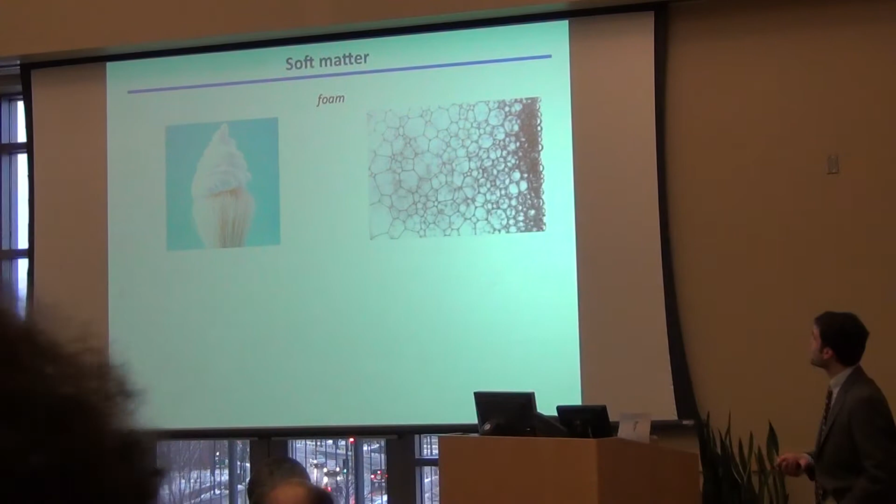So I'm sure at this part in the seminar series, you've heard many versions of the soft matter intro. Let me say that my own interests are in the world of soft materials. So it turns out that soft matter systems display an amazing variety of material properties. So for instance, I don't know the last time you thought about foams. For me, it was this morning when I realized I'd forgotten my shaving cream in Philadelphia. But a NASA press release once described these things as 95% air, 5% water, and yet they behave as if they're kind of soft, springy, squishy solids. Somehow the collective interactions of these simple constituents give rise to a type of solidity.

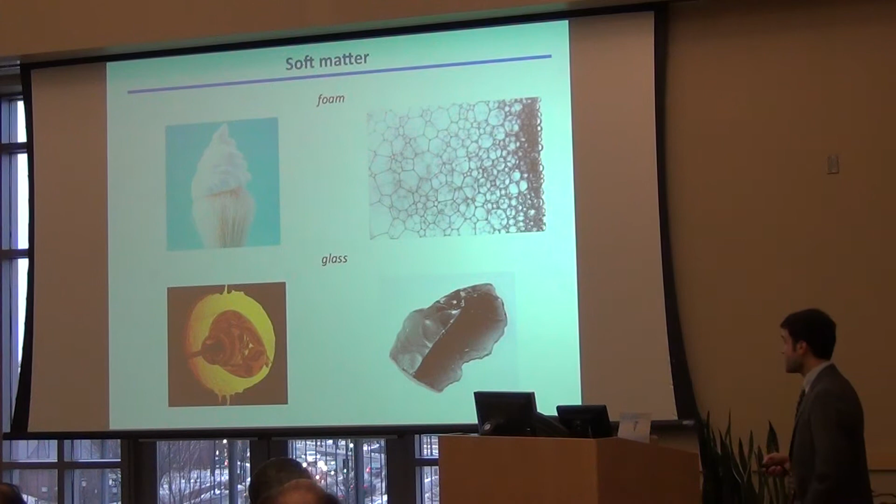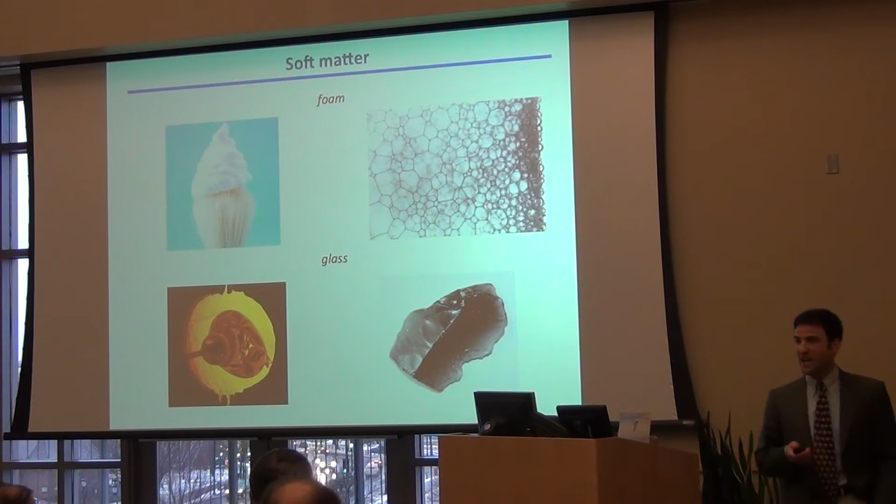Glasses are another canonical example of soft matter systems where, if you look on the atomic scale, they look like disordered fluids, but they too behave like solids, in some cases exemplary solids. So for instance, glasses can hold a monatomically thin edge, so you see them used in surgical scalpels. Soft materials are also the kind of delicious emulsions of fats in amorphous sugar matrices that make our life so delicious. And also the so-called Bingham plastics that we use to clean those emulsions off of our teeth, hopefully more than once per day. The thing I'll be particularly interested in sharing with you today is my work in granular materials. So granular materials are implicated in everything from avalanches and earthquakes to fascinating soft robotic systems.

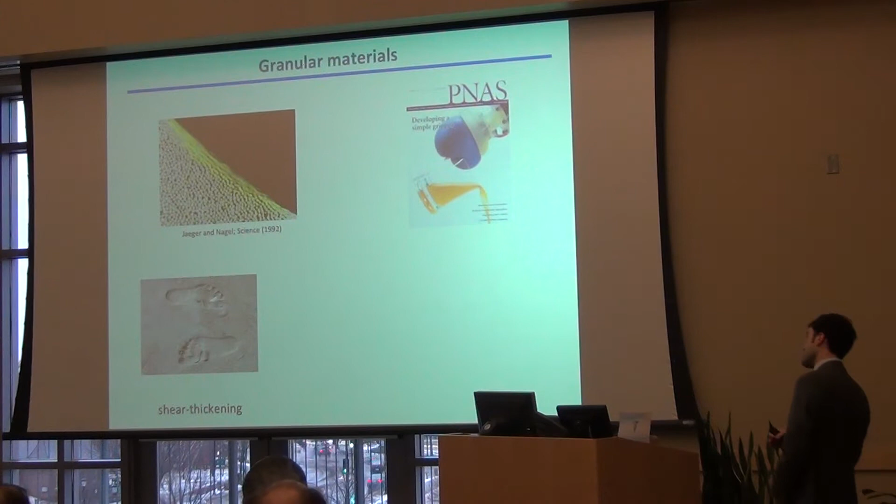But you don't need to go to exotic systems to appreciate how weird sand can behave, right? So I was informed that there are actual sand beaches right here in Burlington. For me, growing up in rural Maine, I didn't have the pleasure of walking on a wet beach until I was in my 20s. But maybe if you have walked on a waterlogged beach, you've noticed that in the wake of your footprints, there's this raised ring of dried out sand surrounding each footprint, right? And it turns out it's because wet sand has this interesting shear thickening property, sometimes called the dilatancy property, where the harder you try to shear it, the more it resists shear deformations.

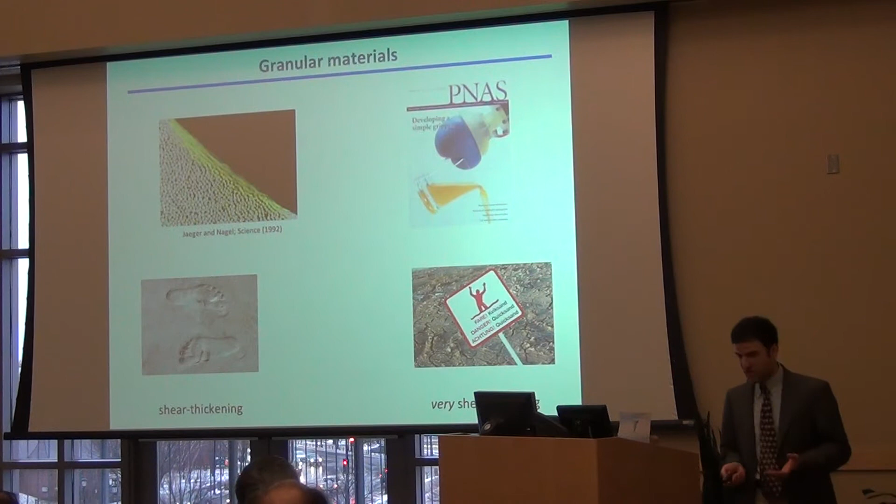The extreme other end of this is when you have just enough water to lubricate some of the frictional contacts between grains of sand, and you get very shear thinning behavior. Materials that look pretty solid, but as soon as you try to stress them, they transition to a more fluid-like state. In between these two extremes, you get what is maybe my favorite animation of all time, at least in the category of granular materials, something of a caveat.

Here's a worker somewhere in northwestern England, walking on a quicksand-like substance. And if you didn't know better, you might think that he was actually walking on a membrane suspended over some fluid media, right? Because, I mean, look, you can see these beautiful ripples emanating from each of his footsteps. At the same time, if you look carefully as he hops so delightfully around the circle, you'll notice that he's actually leaving footprints in his wake, right? So apparently, even though you get these fluid-like ripples, this thing really is a solid, capable of undergoing plastic deformation and maintaining the shape of imprints on its surface.

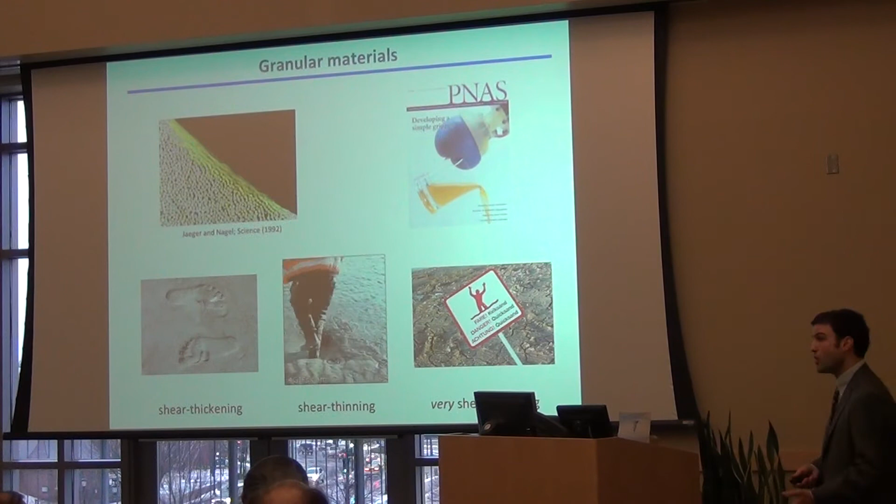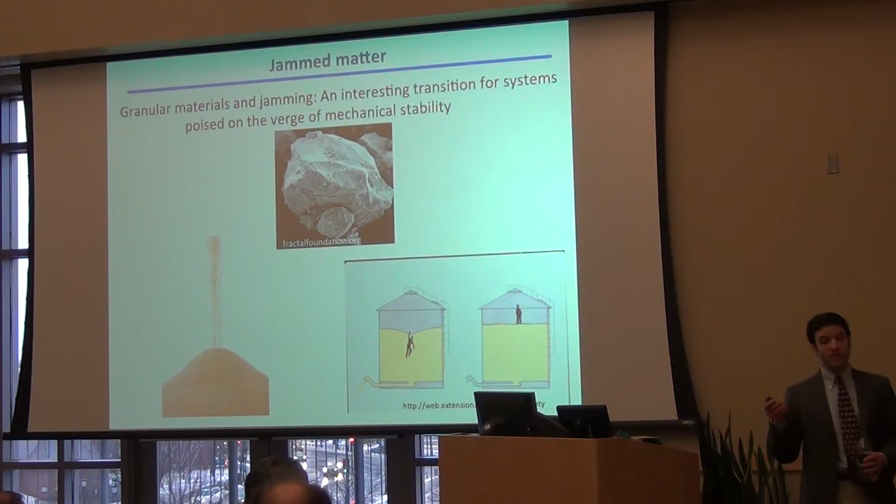It turns out that granular materials are often perched like this substance right on the precipice between fluidity and solidity, or between mechanical stability and instability. You've seen this maybe every time you've sprinkled grains of sand on a sand pile and watched it trigger mini avalanches as the system tries to regain mechanical equilibrium. Or if you've spent any time in the Midwest, as I have, maybe you've seen some of these delightful but, of course, very serious safety illustrations indicating how precarious the difference can be between standing on top of a pile of grains of corn versus being tragically sucked under.

So in this talk, I'm going to be interested in exploring these kind of granular materials, and particularly interested in looking at their interfacial properties. So how do these systems behave at the interface where you might want to mechanically interrogate them?

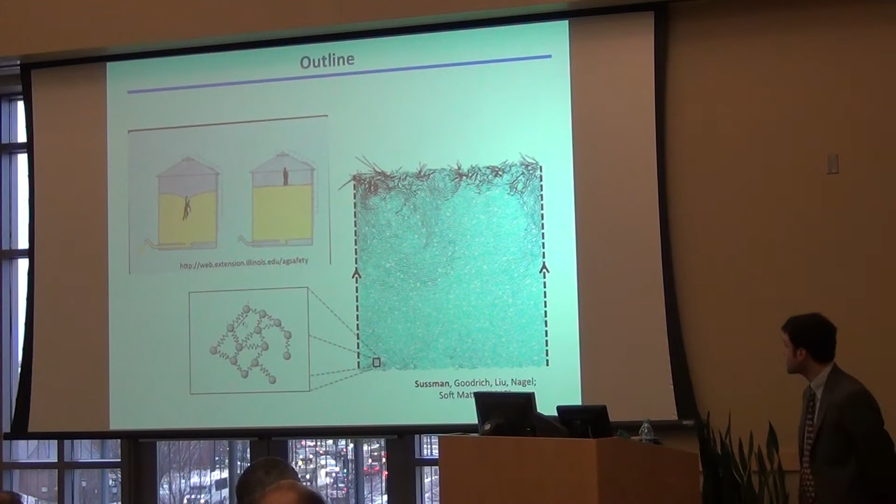The schematic outline of my talk is as follows. I'm going to start by introducing a simplified model of granular materials that we'll use as a touchstone throughout the rest of this talk. I'll then say a few brief words, introducing you to some ideas from topology, and then move on to Maxwell counting, which at this point can just be a bit of jargon, but by the end of the talk we'll understand as a way of thinking about the interplay between degrees of freedom and constraints in different systems in a very generic context.

We'll use these ideas to understand the mechanical properties of our model system, and then I'll finally close the loop and talk about how the topological ideas I introduced in the beginning really help us understand the interfacial properties of these granular media. So obviously there are a lot of moving parts in this talk. It's going to be something of a rolling tour through a lot of ideas, but I promise, just like in your favorite Dickens novel, all of your favorite characters will meet up at the end.

So, granular materials. Real grains of sand, it turns out, look something like this. And while that's kind of, I think, aesthetically beautiful, as a theorist, I find it extraordinarily daunting, right? Because this is about as far from a spherical cow as you could get. So real granular material has bizarre shapes, it has frictional interactions, sometimes complex electrostatic interactions. And the idea of modeling and understanding these materials in all of their full detail is something of an intimidating task.

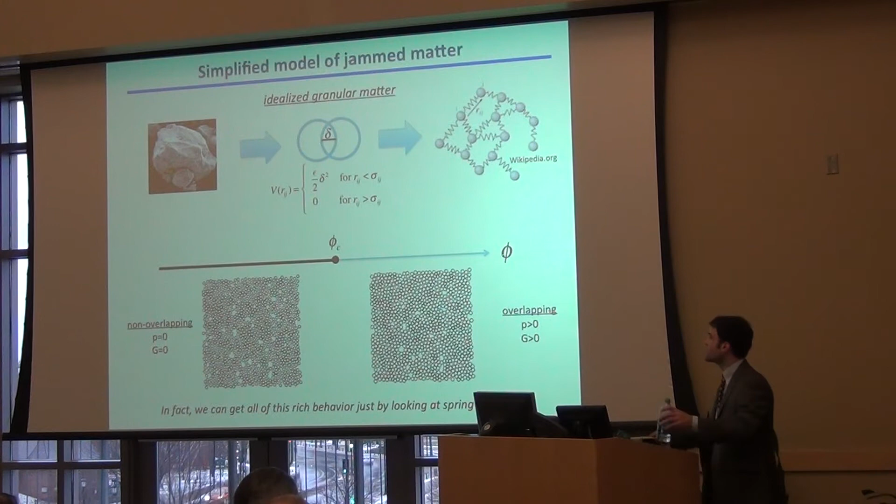So we'll be coming back to this idealized model throughout the talk. Before we start exploring the properties of this model, let me just introduce some ideas from topology. Right, so topology, I would argue in the last, I don't know, X years, where X is some number, has been increasingly used to understand the properties of physical systems, right?

And what is it? It's often somewhat qualitatively defined, as maybe why the coffee cup I was just so generously given is the same as the donut that I wish I'd eaten this morning. I like to think of it as why it's hard to wrap an orange with a sheet of paper. Right? Every map maker knows that if you want to take the surface of the globe and map it onto the plane, you can't do that without making some sacrifices. Either you have to tear the sheet everywhere, or compromise the areas or angles of the forms you're trying to represent.

The version of topology I'll be particularly interested in is this notion of turning geometrical problems, like whether these loops are linked or not, into a counting problem. And the point is that the mechanical behavior of these two systems is really very different. I can take the topologically trivial rings on the left and pull them apart as far as I want. But the fact that there's some topologically non-trivial character here imparts some rigidity to the system. It limits the extent of the deformations I can do.

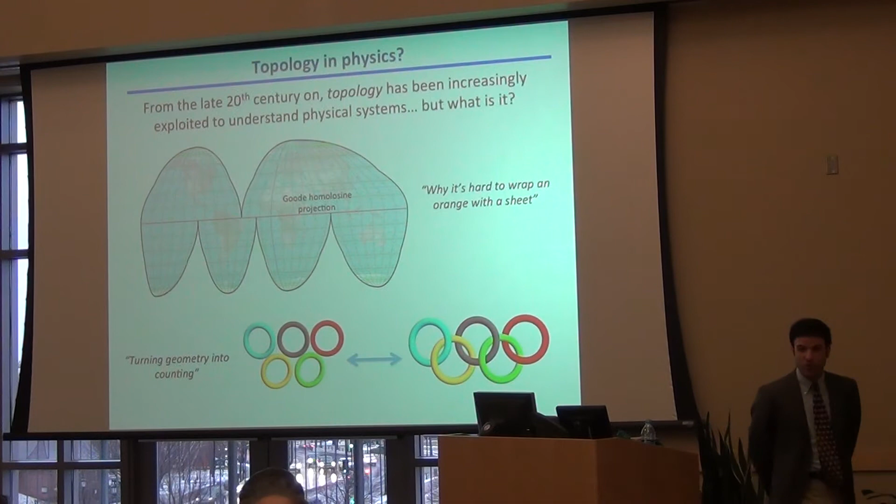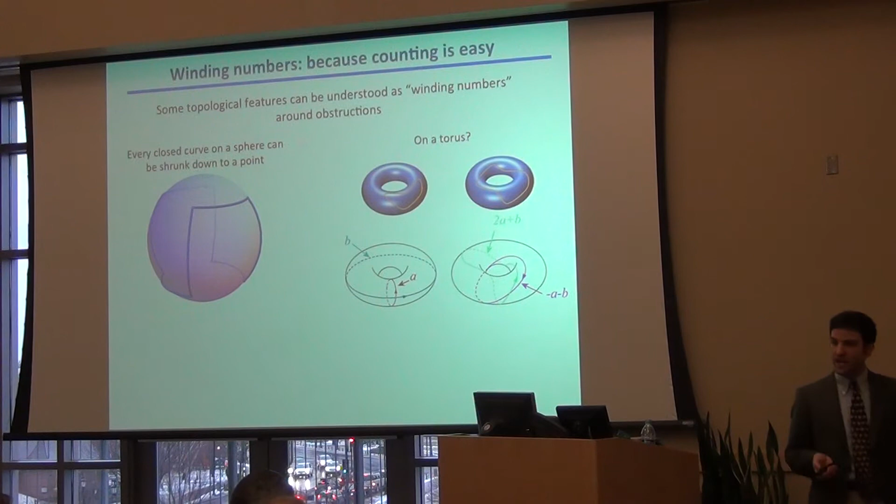So let's explore this idea in a little bit more detail by introducing winding numbers. Right? So imagine you were going to draw closed curves, say on the surface of a sphere. You could imagine slowly changing that curve, slowly deforming it, until you shrunk it down to just a point. You would say you contracted it to a point. If you tried to play the same game on the surface of a torus, you would find, okay, sometimes you can do that no problem, but other times the closed curve you drew wraps around that central obstruction, it wraps around the hole, and so you can't keep shrinking it down.

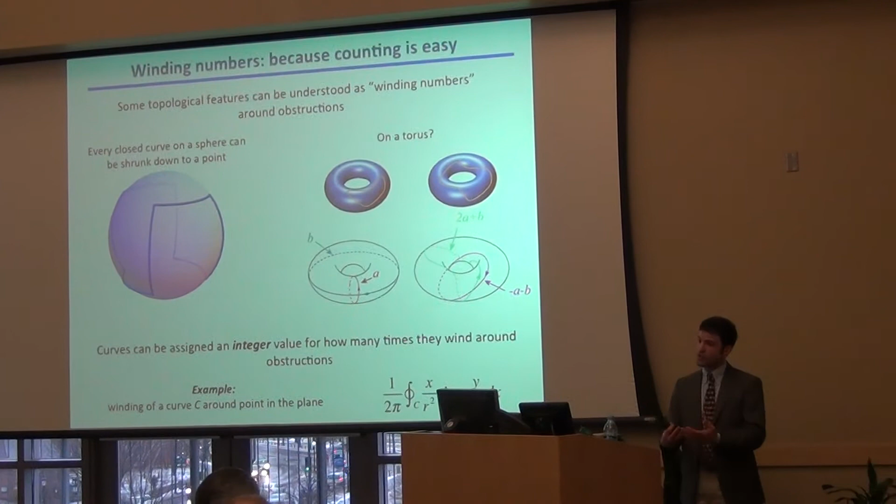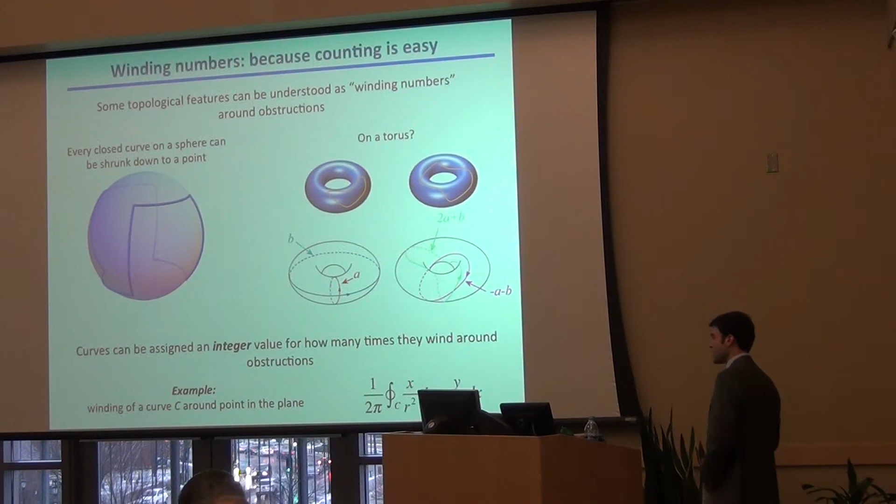So it turns out then that every closed curve that you might want to draw can be uniquely characterized by a pair of integers, just how many times that curve winds around either the long or the short axis of the torus. Okay, so that's great. You might well ask, what are the sorts of physical systems that have these topologically interesting surfaces? And what are the curves that are meant to do the winding on these surfaces that we want to topologically measure? To the first question, of course, I would just answer, well, there are many answers depending on what you want to study, but I would say Fourier space is the most natural

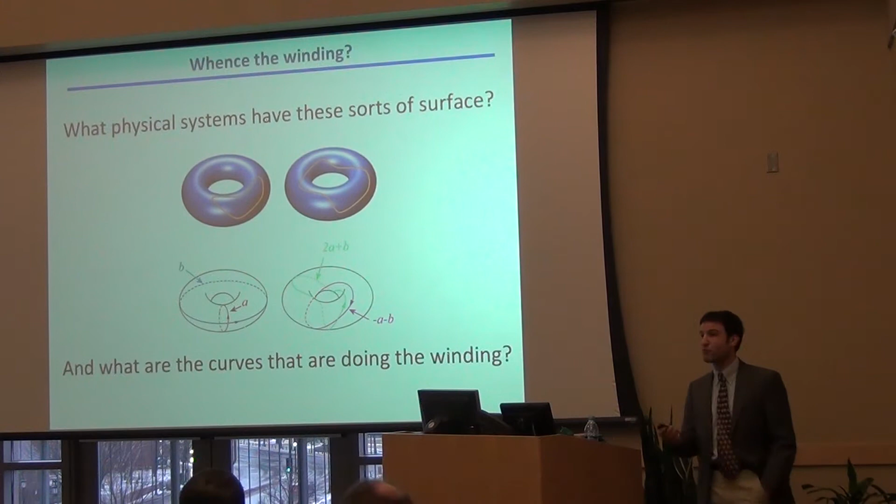representation. So recall, of course, that for periodic systems like electrons in some periodic potential given by a crystalline lattice, Fourier space is the natural representation of things. So the natural basis for your wave functions is given in terms of functions that are periodic within the periodicity of the unit cell, and then some electron momentum terms. Okay? And Fourier space, of course, is precisely a torus, because as you take your wave vector k from minus pi to pi, it turns out you've actually come back to where you started. So going from here to here is the same as going from here around to there. So I guess in a nod to all of my former English teachers, Fourier space is like a natural place around in which to wind.

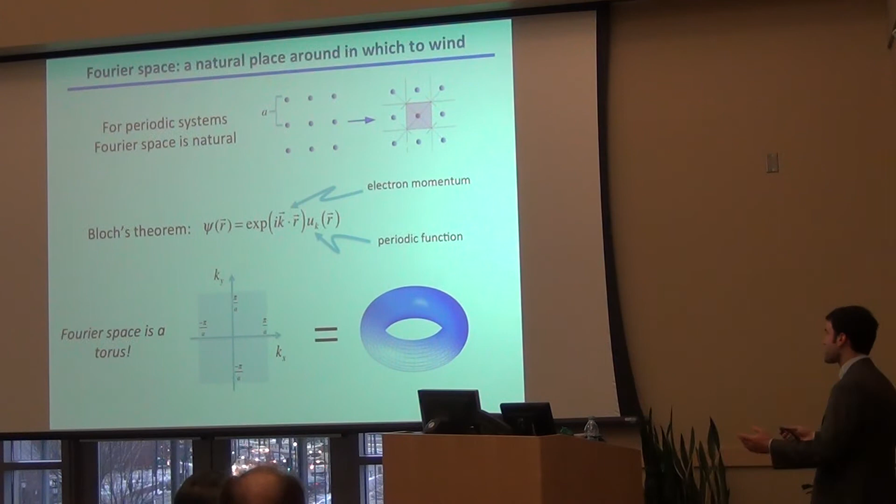Imagine you started at the equator of the Earth, and you had a meter stick pointing due north. You then wanted to walk along the meridian, keeping that stick pointing in the same direction. You get to the North Pole, you walk back down along a different meridian, and then I guess very carefully walk backwards along the equator. And what you find is that even though you tried to keep that vector parallel at every moment, in fact, you've picked up some relative angle between your initial and final configurations. This idea of picking up a relative phase depending on the curvature of the surface around which your curve is wrapping is precisely the kind of intuition that we're trying to capture. So in the quantum mechanical case, the Berry connection kind of works as follows.

You recall that the phase of the wave function is kind of ambiguous, right? Most observables don't depend on whatever absolute value of phase you assign. Of course, interference experiments depend on relative phases.

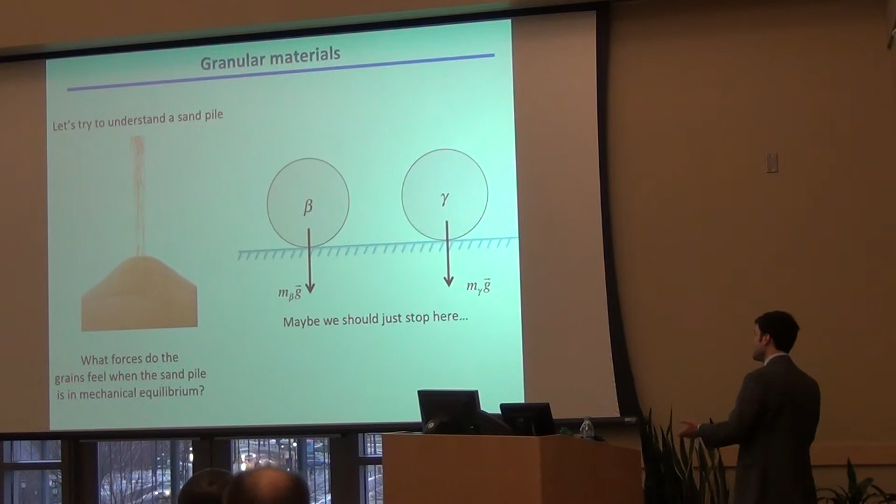Let's start by just doing a simple problem in 2D, where I've just drawn in 3 grains of sand, and I just want to understand what's going on with that third grain. Okay. So, gravity is pulling it down, there are 2 contact forces supporting it. I've drawn in some coordinate system for what the contact forces are. We've all done, I'm sure, many of these free body diagrams.

As soon as you start writing down the equations of mechanical equilibrium, you notice a problem. There are 4 unknowns that we want to solve for here, each of the 2 components of each of the 2 contact forces. But there are only 3 constraints here, right? Force balance gives you 2 equations. Torque balance in the plane gives you just 1 constraint.

And whatever boundary conditions you might want to impose, like static friction, no slip, whatever you like, don't combine to equal a new constraint. So we say the system is statically indeterminate. That is, just specifying that the system is in mechanical equilibrium is not sufficient to specify all of the forces.

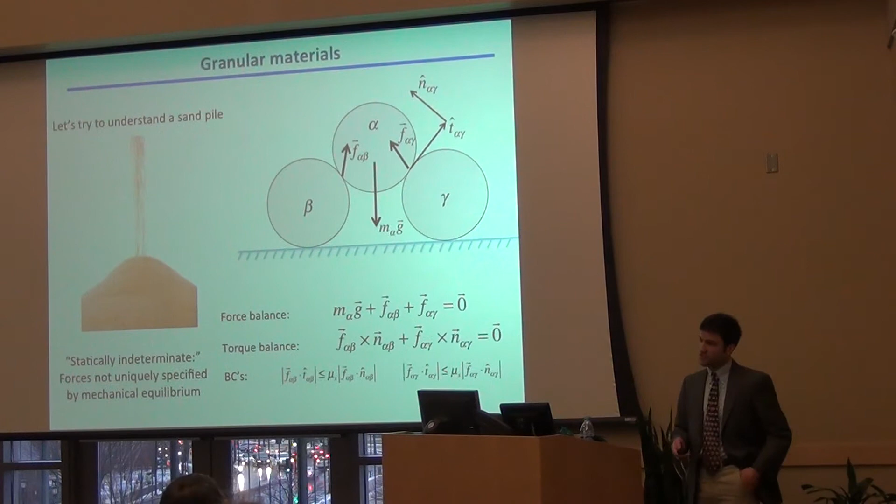So these ideas were used by James Watt to improve the steam engine. And the key point is that this motion doesn't involve changing the length of any of the bonds in that system. So it doesn't cost any energy to perform. So in general, when should we expect to find ourselves in statically indeterminate or dynamically indeterminate situations?

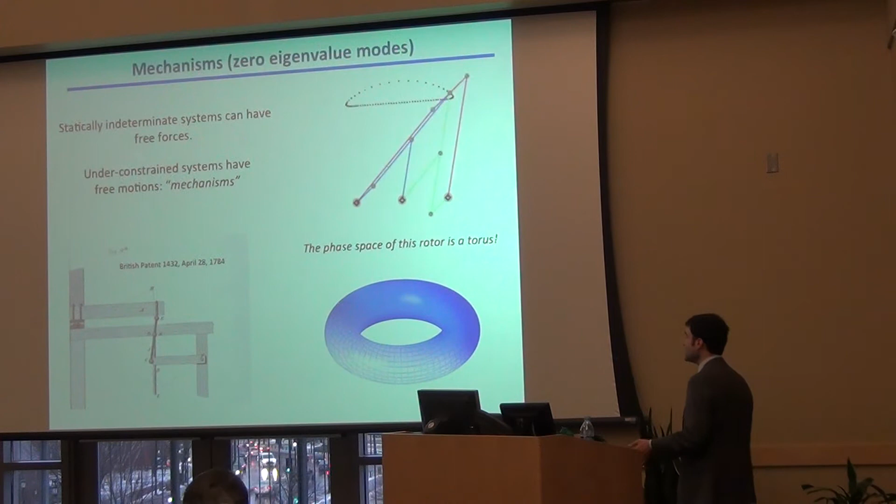An answer to this was given by Maxwell in the mid-1800s, and he gave a purely topological answer. Some might argue it was purely geometric. I'm happy to have that conversation if anyone's interested.

And he said, let's just think about it in the following context. We'll just turn it into a counting problem and say a system is isostatic, that is, it has just enough contacts or just enough interparticle forces to exactly have a rigid structure without being statically indeterminate, if the following 2 things are equal: the number of degrees of freedom in your problem, like the dimension of space times the number of particles, and the number of constraints, like the number of interparticle forces.

The nice thing about this being a purely topological answer is that it applies equally well to many systems, right? Granular materials, but equally well, for instance, understanding the distribution of stresses in classic engineering structures.

Now, what Maxwell actually said isn't just that the isostatic point is when these 2 things are equal. He actually said the number of zero-energy motions, the number of free mechanisms you should expect, is given by the difference between the number of degrees of freedom and the number of constraints in your problem. So the next few slides will just be a lightning round practice to get us all on the same page.

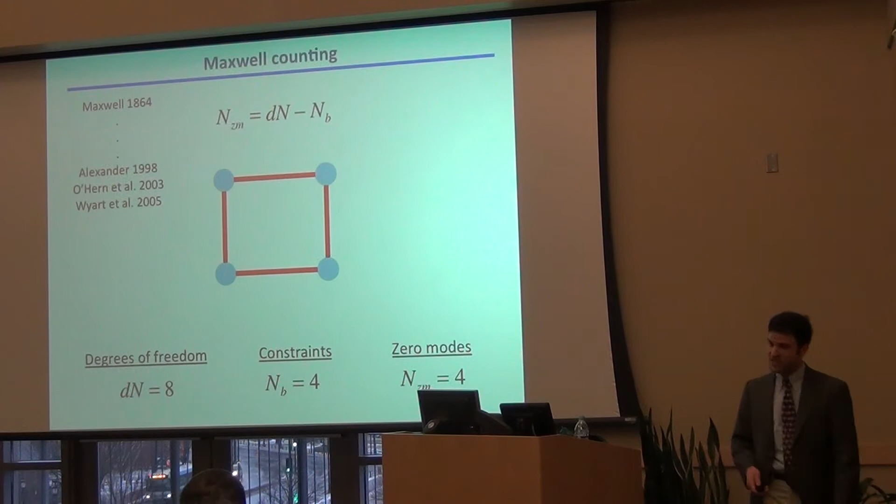Here I have 4 particles in 2 dimensions connected by 4 bonds. So that's 8 degrees of freedom, 4 constraints. Maxwell would say you should expect 4 zero modes. And indeed, there are 2 trivial translations of the whole system and 1 trivial rotation. That's kind of trivial. But there's also this mechanism, a relative motion of the 4 particles that nevertheless leads to no stretching of any of these bonds, so it costs 0 energy.

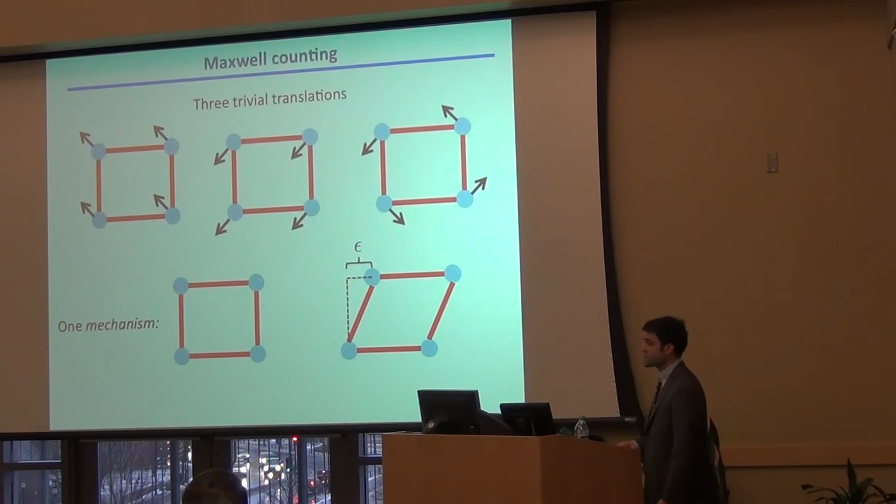Okay, a slightly more complicated example. Here I have 6 particles, 12 degrees of freedom, 8 constraints. Maxwell says 4 zero modes, and they're the same form. There's a center of mass frame for 3, and you get the same shear mechanism as we had in the previous slide. You can throw in an extra bond to get rid of that 0 energy mode, and 12 minus 9 equals 3. You can congratulate me on my hard-won subtraction skills later on.

But what would have happened if we took this bond and put it over here instead, right? The count looks like it should be the same, but it's kind of obvious by inspection that there's a new 0 energy motion, the same one we've been seeing this whole time. So what's going on? Maxwell knew about it, but the answer was rigorously provided by Calladine in the late 70s.

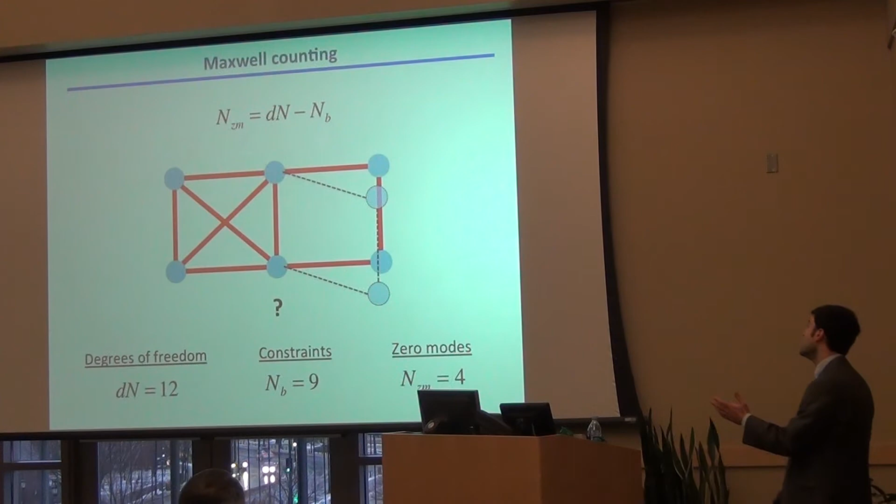And he said, you have to remember that you can be statically indeterminate. If you're statically indeterminate, you can have what are called these states of self-stress. So these are sets of bond tensions or compressions that lead to no net force on any of the particles. Here I've drawn in a simple example. So you can imagine if you take the 2 cross bonds and put them under compression, they push out. Take the 4 external bonds, put them under tension. You could arrange the relative magnitudes of those so that there was 0 net force on each of the 4 corners, right? So that would be a state of self-stress.

And Calladine said, in what you might want to call an index theorem, that it's this interesting difference between the number of 0 modes and number of states of self-stress in a given system that match on to the number of degrees of freedom minus the number of constraints.

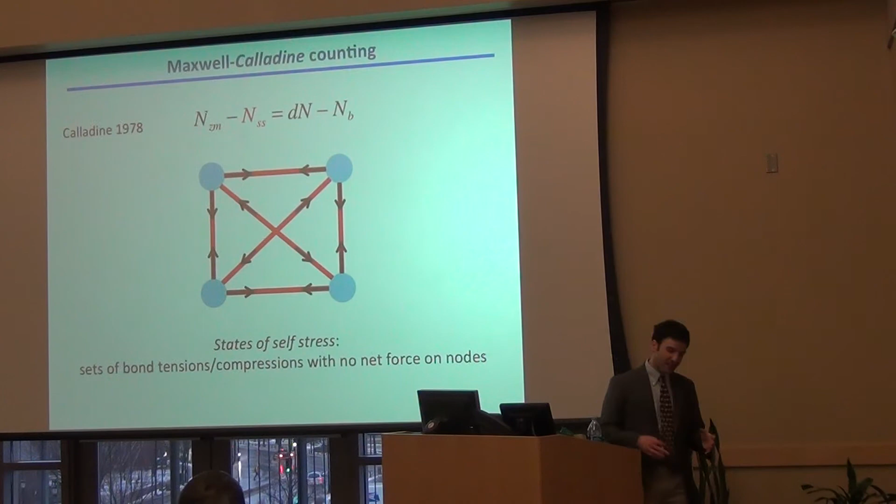Now I want to point out that these are not just kind of interesting curiosities. These states of self-stress form a mathematical basis for thinking about the elastic response of your systems. So in particular, if you want to know the energetic cost of a given deformation, you can write that energetic cost in terms of projections over a sum of all of the states of self-stress in your system. So ideas like this are really used in practice to understand the elastic moduli of materials, or what their response might be.

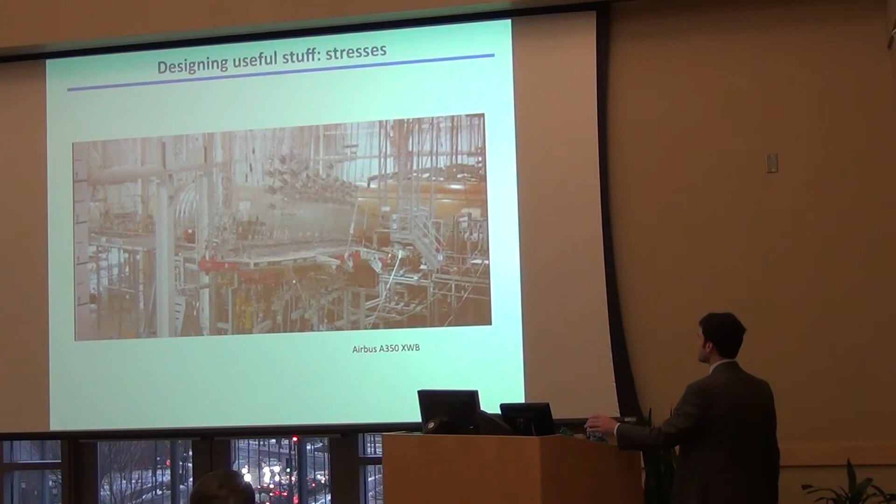Here's just a fun bit of eye candy that I found of engineers understanding exactly how fault tolerant their airplane wings are. I really believe this promotional video was meant to be reassuring, and I did not find it so as I was flying over here last night.

But anyway, you might ask, so far all of the systems that I showed were simple arrangements of particles that you could analyze by eye, right? So how do you imagine taking these Maxwell counting ideas to complex systems, like the sorts of large simulations of model granular material that I claim that I'm interested in? The answer is to turn to geometry. And so in particular, you want to introduce these 2 objects, the equilibrium matrix and the compatibility matrix.

The equilibrium matrix is an object that, given any vector of bond stresses, returns a vector of the net force on each node. Similarly, the compatibility matrix takes a vector of node displacements and tells you how much each bond has to strain in order to accommodate that motion. These, of course, rely only on geometrical information. So if I tell you what the pattern of connectivity between nodes is, and I tell you the node positions, that geometry is sufficient to completely and easily reconstruct what these matrices have to be.

It turns out they're intimately related to each other. It's an application of the principle of virtual work, that these 2 ways of writing down an energetic cost, either displacements times forces or stresses times strains, have to be equal to each other. And so plugging in the definitions, you can learn that the compatibility matrix and the equilibrium matrix are just transposes of each other.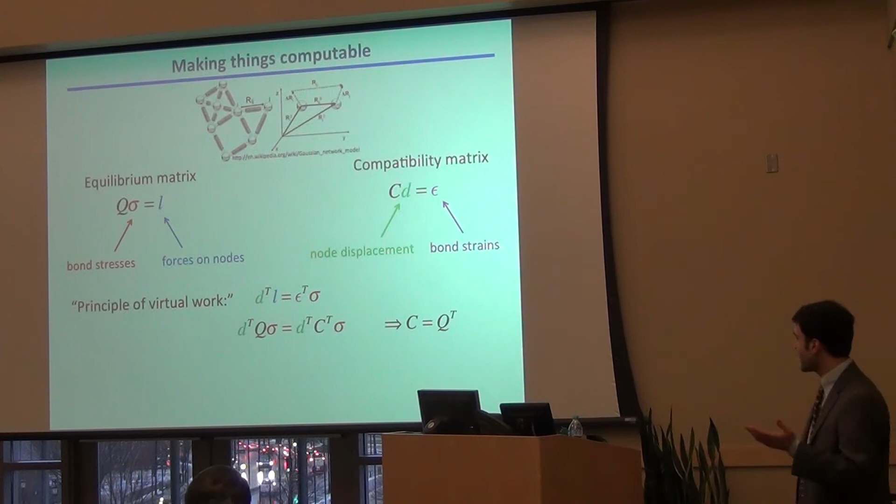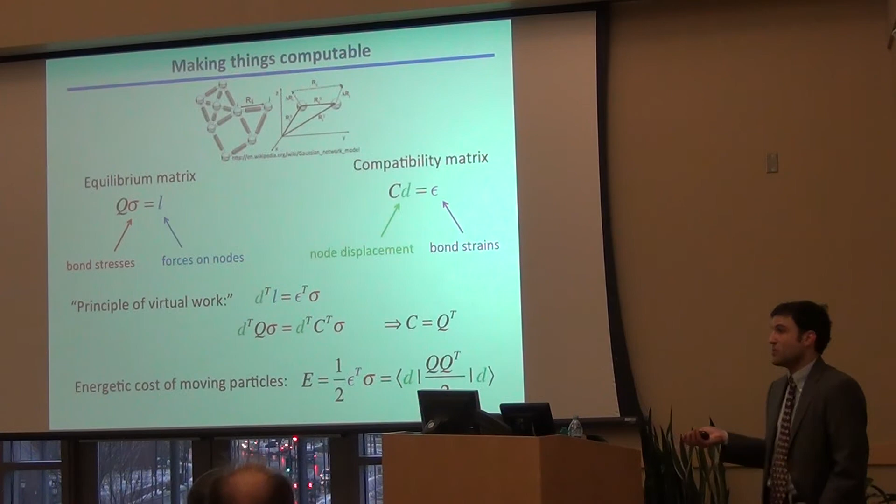With that in mind, you can write down an energetic cost for a pattern, say, of particle displacements by just copying some stuff and remembering your factors of 2. And it turns out this operator, QQ transpose, is like a Hamiltonian for your system. Right? And that's great, because if you have an object that gives you the energetic cost of particle motions, of course, its null space gives you the zero energy motions. It gives you mechanisms.

It turns out an analogous argument can convince you that this suspiciously similar looking operator, Q transpose Q, has a null space comprised of the states of self-stress. So this is great. We've turned our problem into one of geometry and linear algebra. And of course, those are things that we know how to solve.

So for instance, you can use these ideas to then start asking, okay, if you have a model granular system and you start interrogating the surface, you ask what its zero and low energy vibrational modes are, this kind of formalism allows you to easily understand the length scales and spatial organization of the mechanical response there.

I'd like to take a brief aside to mention that, again, these states of self-stress can be usefully thought about to create kind of interesting new materials. So recall what Calladine said, the difference between zero modes and states of self-stress is given by the difference between degrees of freedom and bonds. So if you started with a spring network and you imagined removing a bond, probably you would remove a state of self-stress. Or if you added a bond, you would probably add in a new state of self-stress.

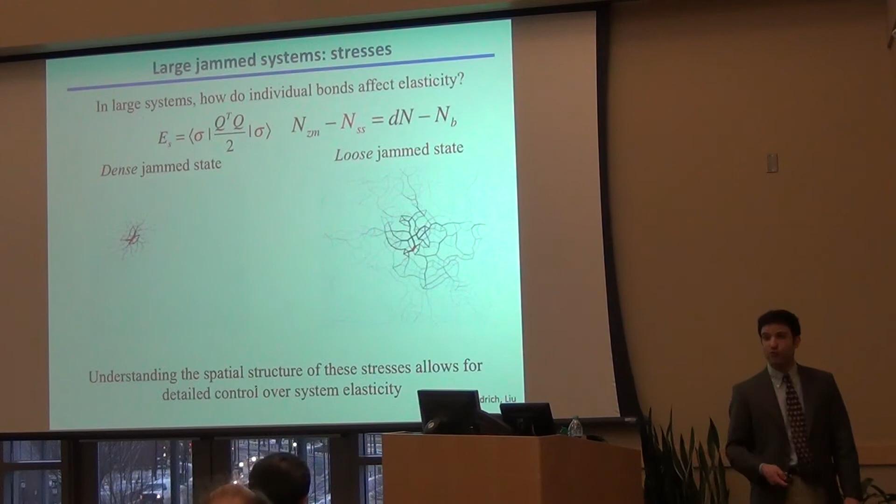So one of the things that I looked at was a way of uniquely assigning a state of self-stress to any given bond in a disordered network. And since the states of self-stress are a basis in which to express the elasticity of these objects, you could imagine taking a spring network and adding bonds or selectively removing bonds until it had precisely the kind of designer elasticity that you might want. So I think understanding the spatial organization of these stresses would really allow for interesting new materials to be designed.

Of course, it turns out that the spatial organization of these states of self-stress display some interesting scale invariance as a function of distance to the jamming transition, a critical point in this case. For the aficionados, one of the interesting results of this study was that the diverging length scale associated with that scaling collapse turns out to have a very unusual exponent, one that hasn't been seen to date in jamming literature. So it's kind of an interesting result.

And maybe you're not quite as excited about grains of sand as I am. It's hard to imagine, but I guess I have to at least admit that's a possibility.

I want to stress that these ideas of Maxwell counting are really quite generic. So for instance, you could stare at this assembly of rigid origami and start thinking to yourself, okay, the degrees of freedom here are like the positions and orientations of each of these faces. The hinges between the faces provide my constraints. And so I can think about what kind of mechanisms I can get out of

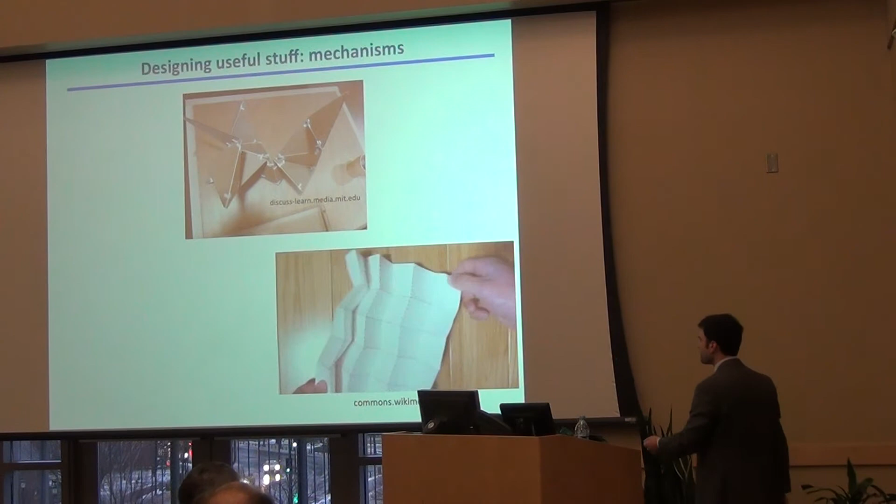origami. A canonical example is this so-called Miura fold, which is a simple origami pattern that can take a big flat sheet of paper and flat fold it into a nice compact package. In fact, this very fold was used to send solar sails into outer space because they could package the solar panels up in some tiny little cargo pod and then easily unfurl them once they got there.

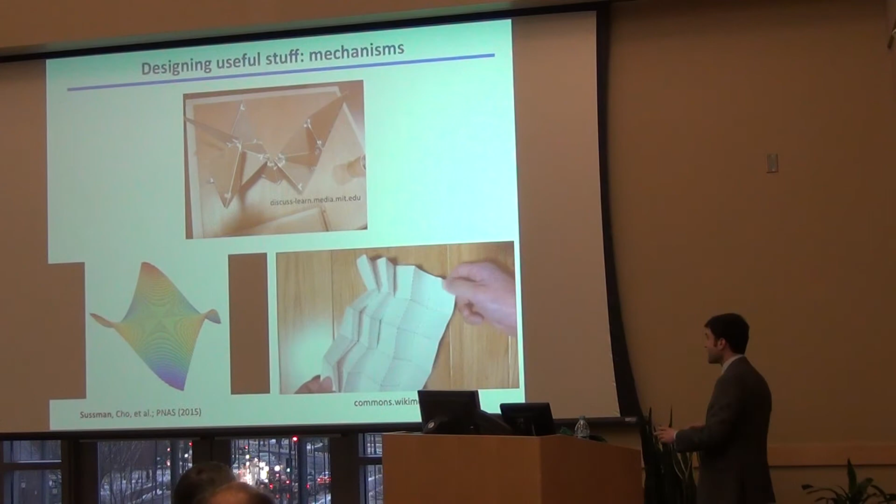And I've used similar ideas about the mechanisms involved in these kinds of origami structures to design kirigami patterns, so origami plus cuts, to make a single pattern that can assemble and disassemble into a wide variety of possible target structures. Right? So it's kind of

Okay, so now we have all of the pieces in place to understand where the topology enters our problem. Right? We have degrees of freedom and constraints. We have zero modes and states of self-stress. We're ready to go. So one thing that you might ask, of course, is can any of these simple mechanical systems that I've talked about, like origami or like collections of masses and springs, have topologically interesting properties?

One of the very interesting advances in the last few years, due to Charlie Kane and Tom Lubensky working at Penn, was to make this observation that the vibrations in some of these marginally rigid mechanical systems can be formally mapped onto the problem of the electronic states in, for instance, a conducting polymer that we know has interesting topological character. So in the next few slides, let me unpack what that analogy really is.

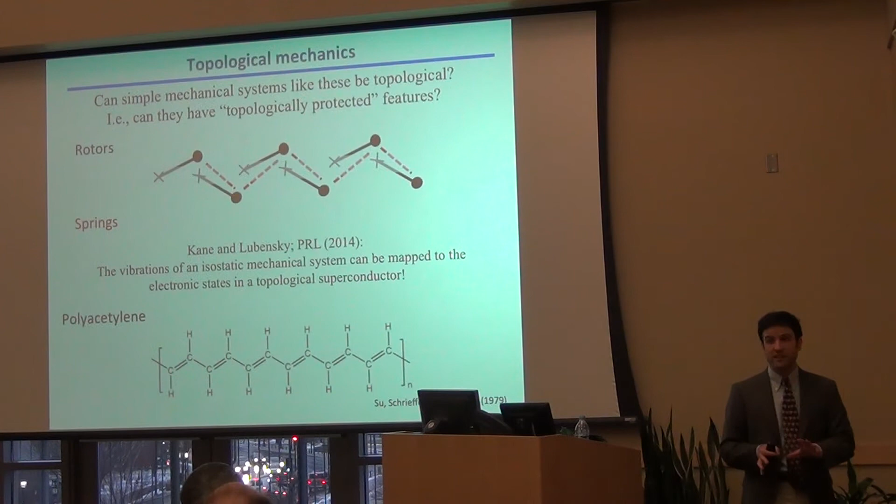And we'll start just with our constraint count. Right, so here is a bunch of rotors, so each of these sticks can just rotate about that cross freely in the plane, and there are 5 springs that are coupling them together. So if I ignore the boring center of mass motions, there are 6 degrees of freedom here, there are 5 constraints. Maxwell would say there's one zero mode, and indeed, we find that there's a mode that sits on the edge. So the edgemost particle vibrates quite a bit, the next one less, the next one less. You get exponential localization of this vibration.

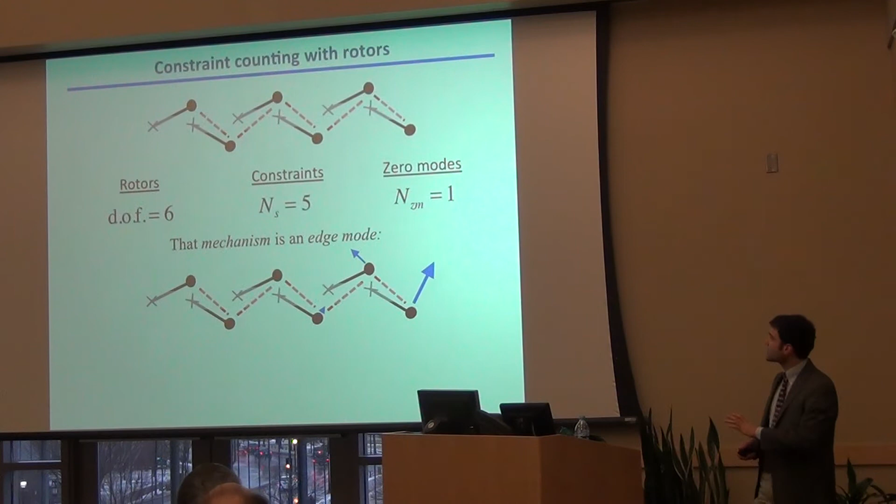Where might the topology be lurking in this description? Let me answer that by starting to build up a mathematical expression. Okay. So we'll start with K. So let's imagine not that we have 6 rotors, but that we have an infinite chain of rotors, so that I can really think about going to Fourier space and working in that language where I know that there's a torus hidden somewhere. I'll then take the compatibility matrix, a function of the wave vector, and let me remind you that as a non-symmetric matrix, the compatibility matrix can have complex eigenvalues. Okay, just factors in your algebra.

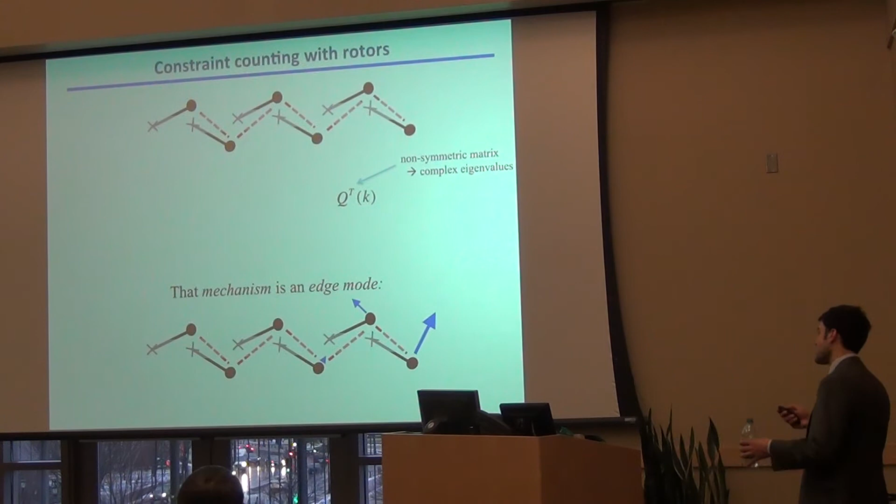Of course, if it can have complex eigenvalues, then its determinant, which is the product of the eigenvalues, is just some number in the complex plane. So if you look at the imaginary part of the log of the determinant, you pick up what the phase of that complex number is. Okay? So this thing may not look particularly intuitive, but it's precisely the kind of geometric phase, Berry connection-like object that you can imagine doing loop integrals around Fourier space of, to ask if you can get any non-trivial windings.

I want to make the connection to the electronic topological states a little bit more explicit. So let me remind you that I said you could write something like the energetic cost of a set of particle displacements with this Q transpose operator, and the energetic cost of something like applying stresses to all the bonds in terms of this Q transpose Q. So you could imagine writing down a combined Hamiltonian for all of these types of perturbations. Something like you gave it a vector of displacements followed by bond stresses, it would give you the total energetic cost. Right? If you did that, it would look something like this. It would be some block diagonal form.

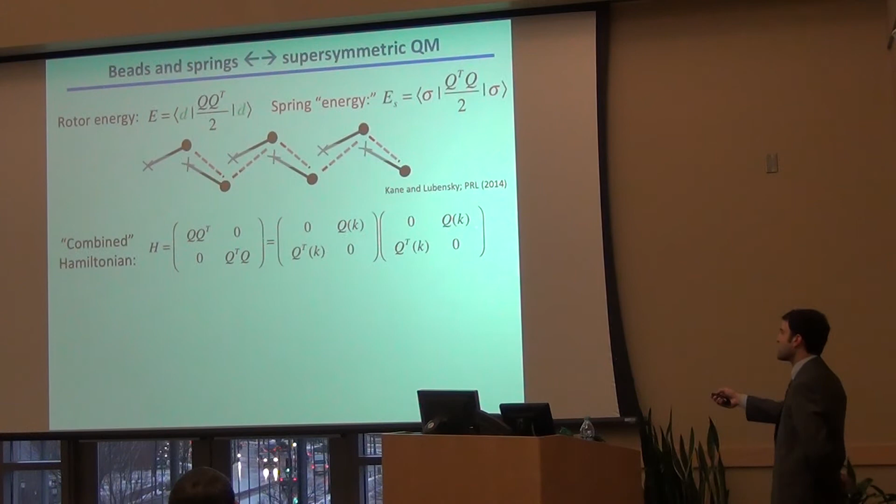And what Kane and Lubensky noticed was that you can kind of take the square root of this Hamiltonian, and you get something that has this kind of structure. Right? So first, let me just kind of wave my hands and be a guru and say that this kind of structure here is precisely what N equals 2 supersymmetric quantum mechanics looks like. And it's precisely matrices of this form that they made the connection with in the so-called Su-Schrieffer-Heeger model, where here the Hamiltonian is telling you something about electrons hopping from one sublattice of your polymer chain to the other sublattice. The point is just that you have some kind of interesting mathematical formal equivalence here, so that just as this object can be topologically non-trivial, so is there at least the possibility that these objects can be non-trivial.

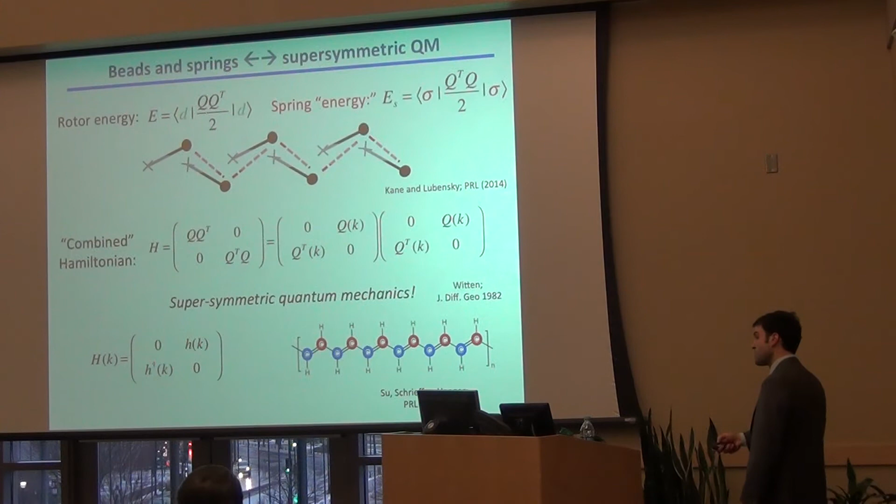Right. And here it turns out that, what you would want to call a particle hole in the electronic version of the problem, the states of self-stress and the zero modes are like the supersymmetric particles of each other. Okay. Now it turns out that the topological information embedded in these windings, which tell you about if you can have edge modes or not, doesn't depend on the fact that we played this Fourier trick and assumed we had an infinite lattice. So in fact, the topological information somehow even survives to considering finite lattices.

One way you can pick this up is, for instance, by imagining gluing together two chunks of differently topological material. So if you take a few rotors here on the left that are in one topological state, and glue them next to a few rotors on the right that are in a different topological state, it turns out you can exponentially localize interfacial modes, either zero modes or states of self-stress, depending on what the two topological states are.

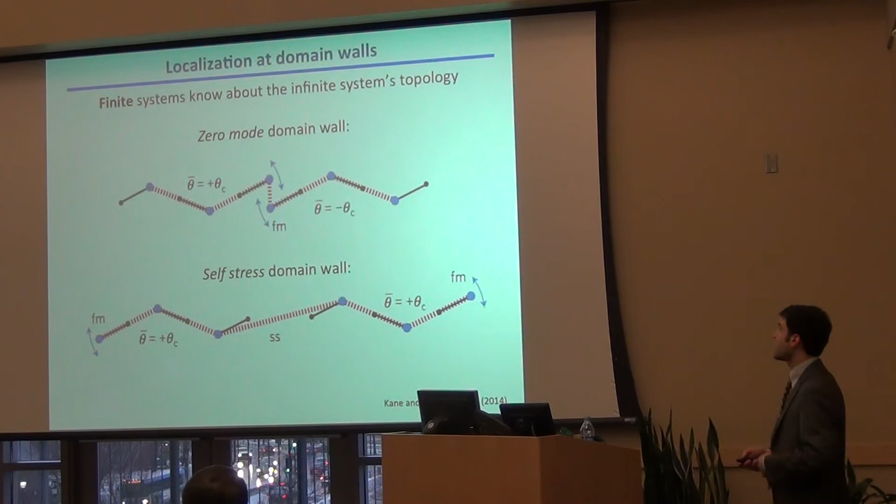This idea of topologically protected interfacial modes between material of different topological class isn't restricted just to these rotors. It applies to bead spring networks of the sort that we're interested in. So Kane-Lubensky also looked at this repeating three-site unit cell lattice and showed that if you take a chunk of material, which they were able to infer had some topological polarization, and wedge it in between chunks of material that were topologically trivial, you find that even though the counting says you don't need to have either zero modes or states of self-stress, the topological polarization condenses charge, or condenses zero modes and states of self-stress onto those boundaries.

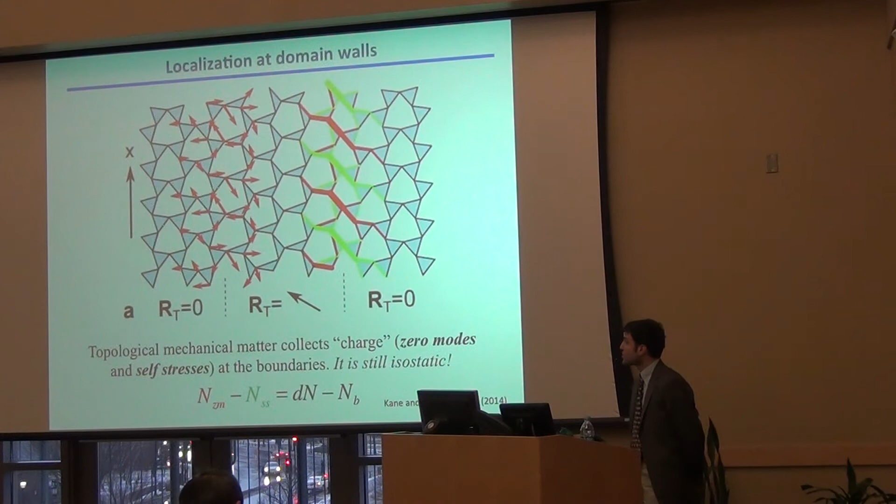So to date, a lot of the work in this field has been looking at simple lattices, right? So Kane-Lubensky looked at the one-dimensional chain of rotors, or a two-dimensional array of three-site unit cell lattices. I know my friend Zeb was here, I believe, just last week, and I'm sure he told you about his very exciting work looking at four-site unit cell lattices, where you can get really quite rich behavior in these topological systems. The question I have is, do these topological ideas have anything to say about disordered granular materials, right?

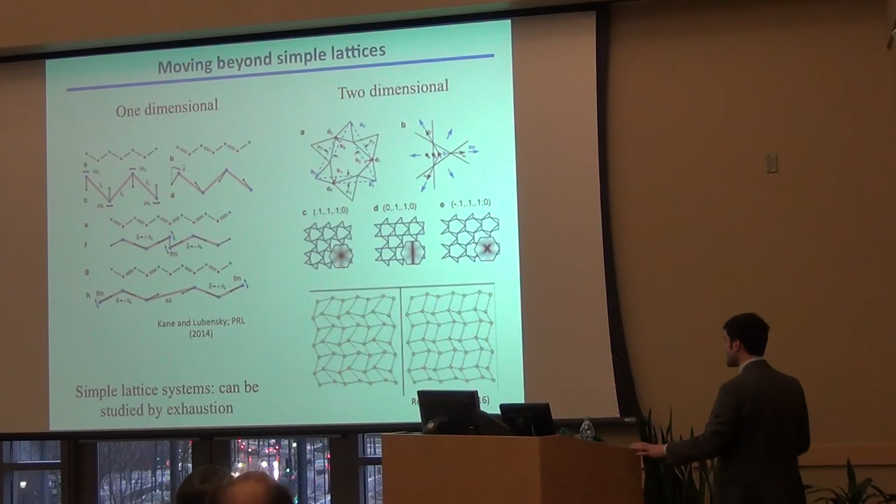One way of phrasing the question is to look at Zeb's diagram here of the configuration space of his lattices. So the idea here is that you fixed the location of three sites in your unit cell, and you imagine putting the fourth site anywhere in this unit cell. And then the symbols tell you, okay, if you put the fourth site over here, you'd be in a topologically trivial phase of matter. If you put it over here, you'd have some topological polarization. There are some shaded in regions where you get Weyl-type singularities. And so you might ask, okay, if you have configurations of the sort generated by throwing grains of sand in a box or compressing collections of soft spheres until they're mechanically rigid, do they live in a topologically trivial or non-trivial part of whatever the analog of this configuration space is?

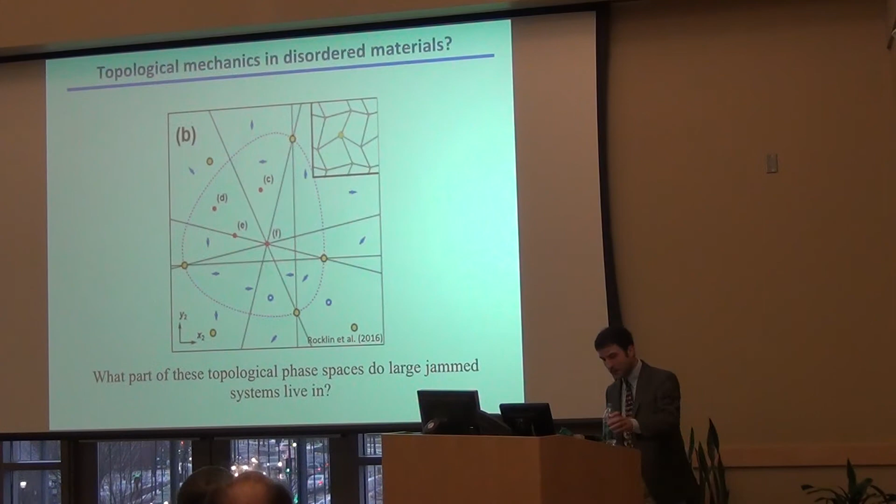Now you might say, we already know exactly how to solve this problem. I told you that some winding number characterizes the topology of these systems. So just do this loop integral of the log of the determinant of your compatibility matrix and just tell me the answer. The problem is that for very large granular systems, this is a numerically completely unstable calculation. Okay? And so you have to be a little bit clever. So one thing you can do is to say, all right, the winding number here tells me something about the distribution and character of the protected surface modes in my system. So an alternate way to go about my problem is to directly try to study the surface modes and then infer whether there's a topologically non-trivial character to your states.

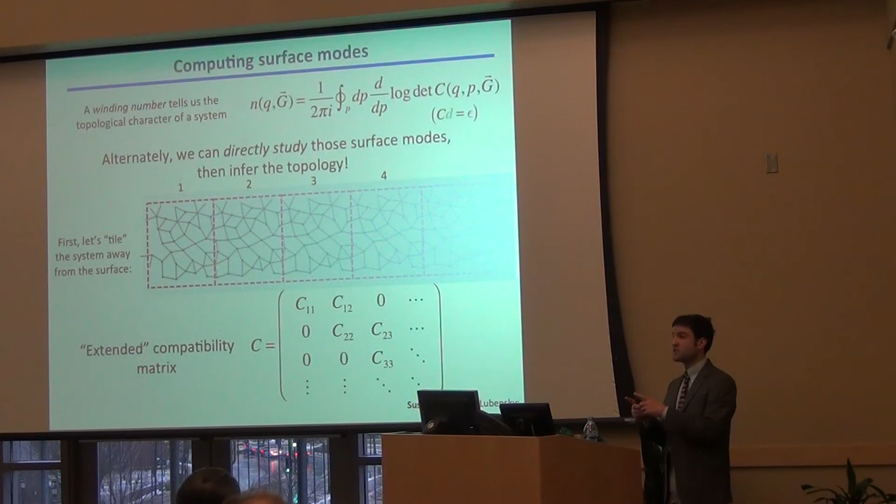In this language, a zero-energy surface mode would have this form. This is just definitionally to say nothing in a unit cell or across a unit cell stretches. An ansatz for solutions to these would be to have exponentially decaying surface modes, right? So the pattern of displacements in one unit cell would just be some multiplicative factor, maybe with some oscillating phase, of whatever the pattern of displacements in the previous unit cell were. When you write it in this form, it turns out the whole game is what values of lambda, which is something like the effective decay length of these surface modes, allow you to find solutions to this equation. It turns out the set of allowed lambda are given by this determinant condition. So if the determinant of the diagonal plus lambda times the off-diagonal terms vanish, then that lambda corresponds to an exponentially localized surface mode.

You know, I mentioned before that the determinant problem was numerically unstable here, so you still have to be a little bit clever. And I'll speak to how you get around that problem in just one or two slides.

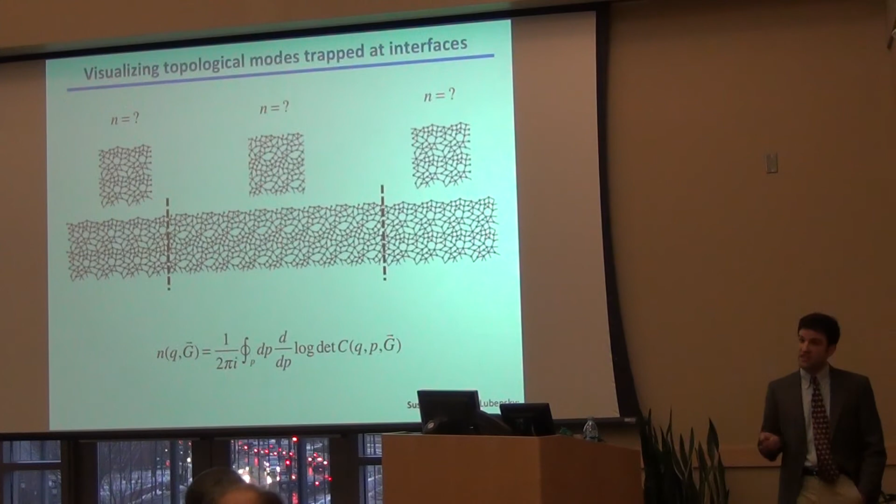But let's say that one version of "did you find success with this project in finding topologically non-trivial states" would be to play the same game that Kane Lubensky did and say, if I can find a topologically different lattice and I wedge it in between some other type of lattice, I should expect localized domain walls, right? So just as a teaser, of course, that's exactly what we find.

So here, for just that smaller version of the system, you can see that again, even though the whole system is exactly isostatic, so there don't need to be any zero modes or states of self-stress, you find exponentially localized zero modes and patterns of stresses in your material.

And I want to give you the idea that you could imagine using these ideas to create real interesting materials, right? So one thing you might think is, okay, if I have a state of self-stress that's localized at this point in the material, that means that as I apply an external deformation, that's where all the stresses are going to concentrate, which means that's where the material will fail first, right? So you can think about designing materials that fail in specific places in some topologically robust way.

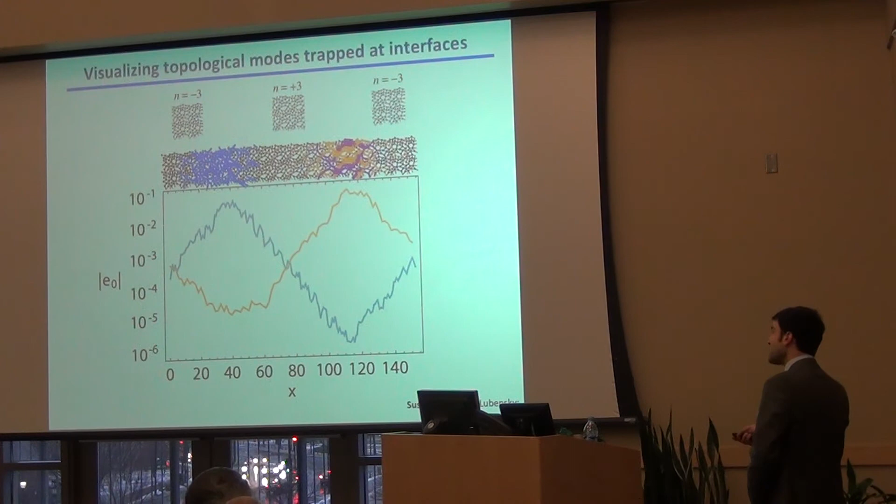Like maybe you want topologically robust, I don't know, wrinkle zones or crumple zones in your car so that it doesn't fail near the passenger or near the engine block or something. Right? And people have really started playing with these ideas to create actual materials that do exactly that.

So here's a lovely paper from Jason Paulose and Vincenzo Vitelli, where they topologically engineered states of self-stress to be in a particular point in their material, and then really showed that as they applied external stresses, that's exactly where the system buckled and failed first.

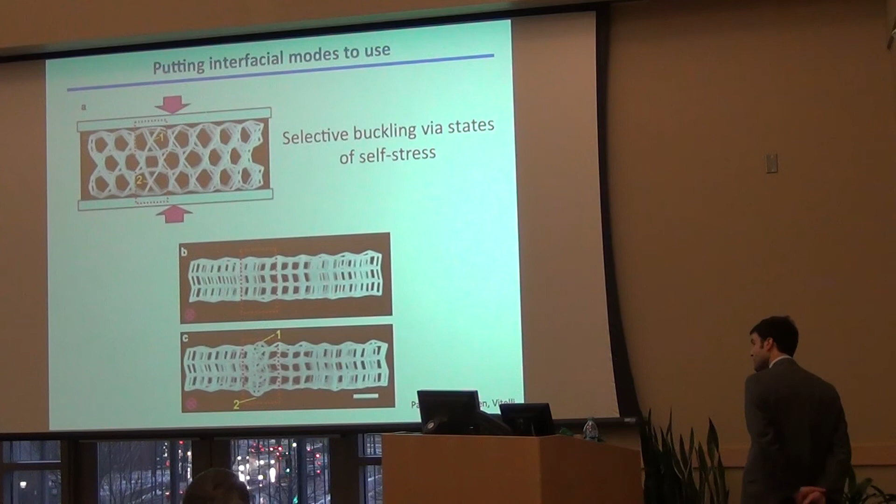Okay. I'll mention, as a curiosity, to answer this question of what part of the configuration space do jammed systems live in, it seems from these small unit cell studies where we can do the full loop integrals quite stably, that jammed systems generically live in a Weyl point-rich part of phase space, right? So if you really had an infinite lattice made out of these things, these would be locations that interestingly mixed surface zero modes and bulk zero modes together.

From my perspective, this is a little bit of a curiosity in that for jammed materials, you're really only caring about the Q equals 0 limit, right? You're not thinking about having a repeating lattice of buckets of sand.

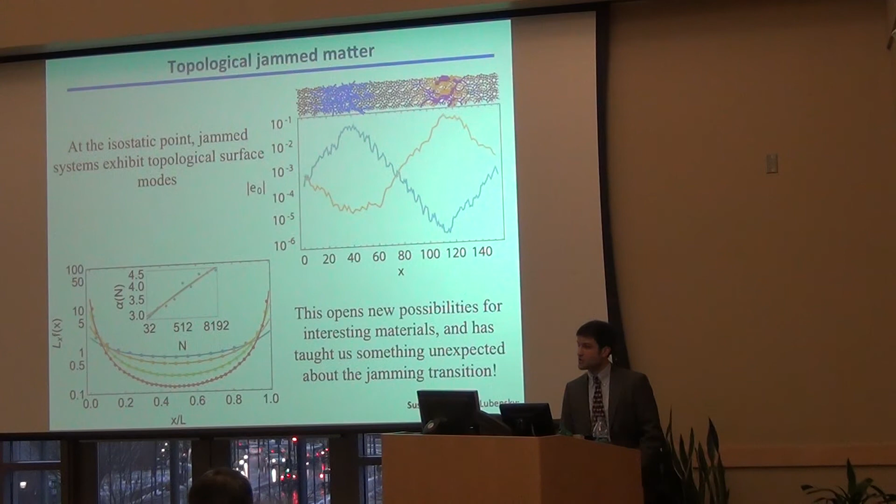In lieu of a summary slide, let me give you the impression that this idea of exploring the interplay between geometry, topology, and soft matter systems is something that's really run through a lot of my research. So the same ideas about putting in defects and understanding the curvature of surfaces was precisely how I designed some of these origami patterns to assemble into a variety of interesting target structures.

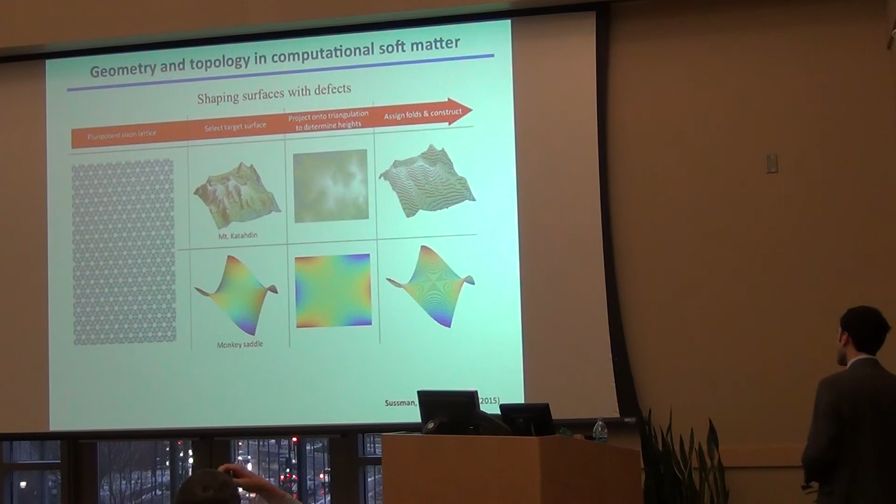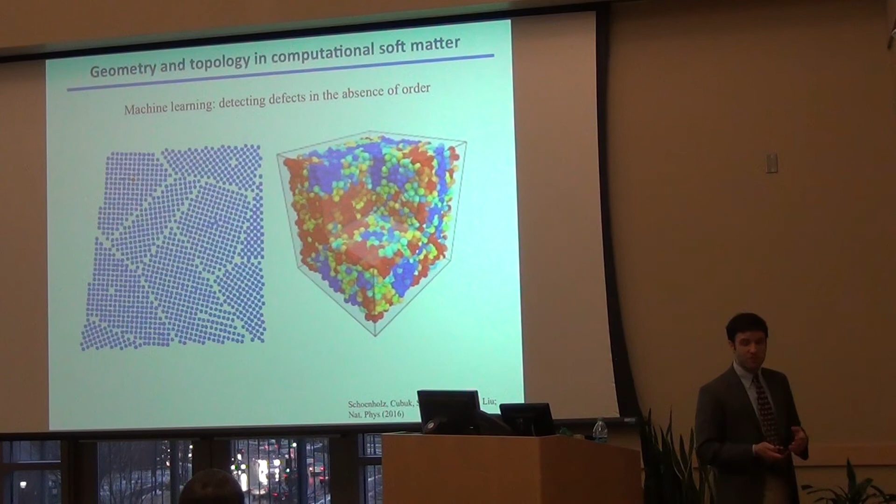Our understanding of topological defects in crystalline systems has partly informed some of the machine learning work that I've done in an effort to find analogs of topological defects in amorphous materials. And the same kind of topology of linked and unlinked loops, it turns out, informs not just piles of sand, but also the dynamics of entangled polymeric fluids, either synthetic or biological macromolecules.

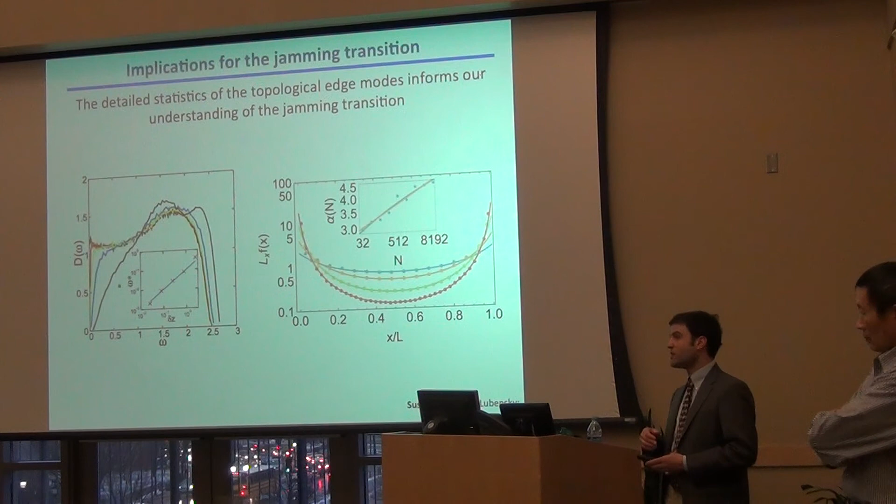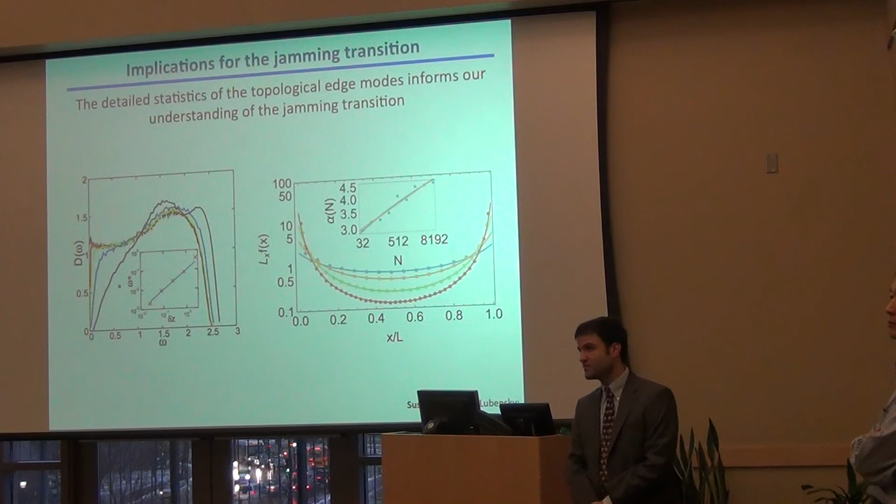So a standard way of understanding why you got that particular boson peak involved an interesting variational argument on what was presumed to be the structure of the surface modes. And it turns out some of the assumptions in that theoretical description, just trying to be tactful here, turned out to be incorrect assumptions. And so there is no explanation for the boson peak. So that's right. So now we are at a point where there are a few new competing ideas.

After we put this paper on the arXiv, the creator of that original variational argument, we had a nice email discussion, and a few days later he proposed a different explanation, the detailed assumptions of which remain to be checked. So at the moment I would say the state of whether we understand this is unsettled.

What are the details of this computational instability you mentioned? What actually makes doing this hard numerically? Oh, right. Yeah, so somehow I think a slide either skipped over or got deleted, which is fine. So the point is,

this version of the determinant problem has a slightly different difficulty than this version of the determinant problem. In this case, it's reasonably stable, but you have to compute this value at many values of wave vector, and then for every surface you want to pick. And so it turns out to be just too slow, because the numerical computation of any large determinant slows down pretty unacceptably. So it goes as the eigenvalue problem. That isn't a stability issue, that's just a parallelization problem. Yeah. So that's a parallelization problem.

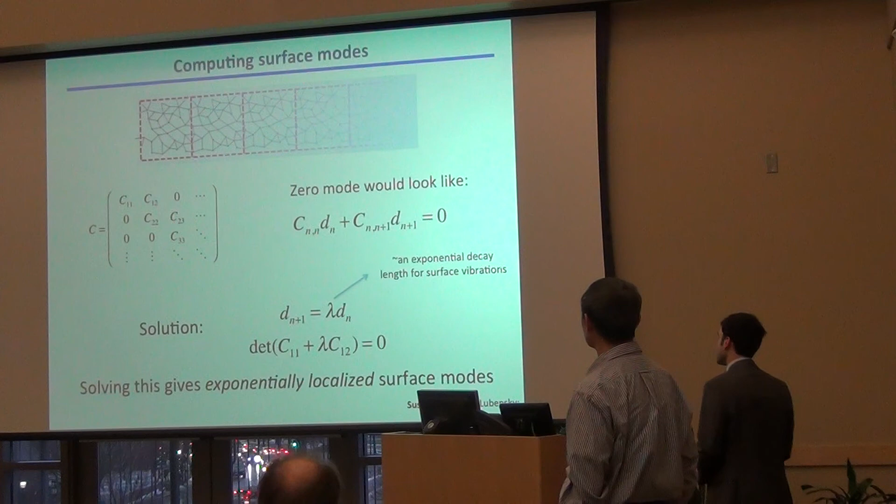This version of the problem really does suffer from instability in that you're looking for determinants of matrices, and they're achingly close to zero. So if you look at the characteristic polynomial of these things, if you do it naively, you get these ratios of polynomials in lambda that contain lots of terms that are, to within numerical precision, zero, but definitely can't be zero because you know what order the polynomial has to be.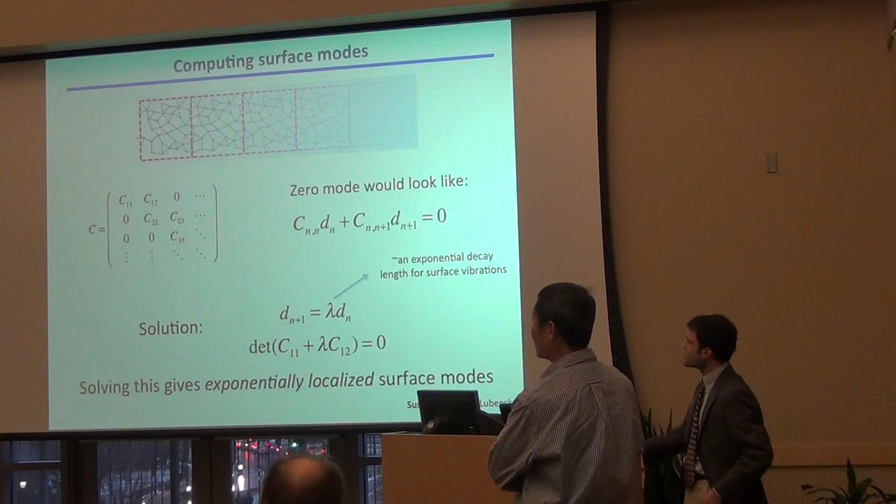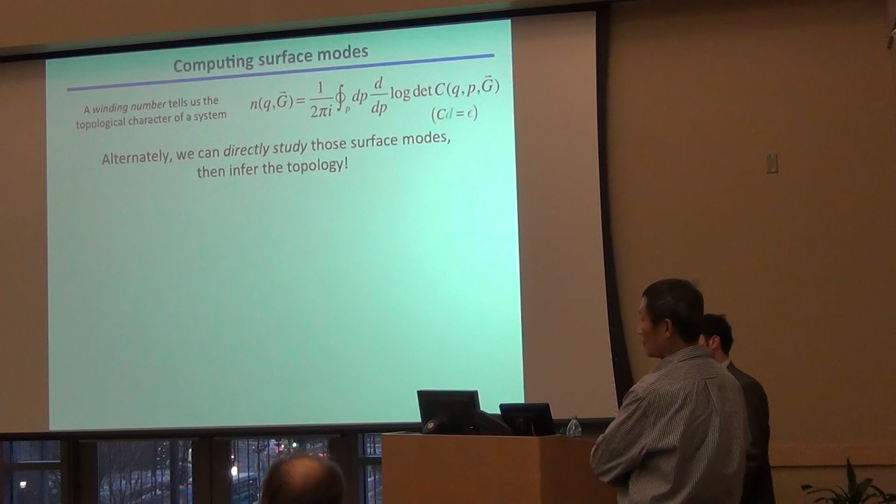So this version of the determinant problem suffers from numerical instabilities. This version of the determinant problem suffers from computational parallelization problems. That's exactly right. But in either case, solving the sparse eigenvalue problem associated with this version is trivial.

Stay here. I have a question. Now, look at this. Yes. This radial stretching. Is that artificially put in there? That is probably because when I cut and pasted into PowerPoint, it must have distorted it. So these are supposed to be identical copies of each other. But staring at it, I can see what you mean, because the red lines cross the bonds at different points.

Right. Good eye. Oh, okay. So yes, that mistake is a mistake of the slide creator, not of the underlying mathematics.